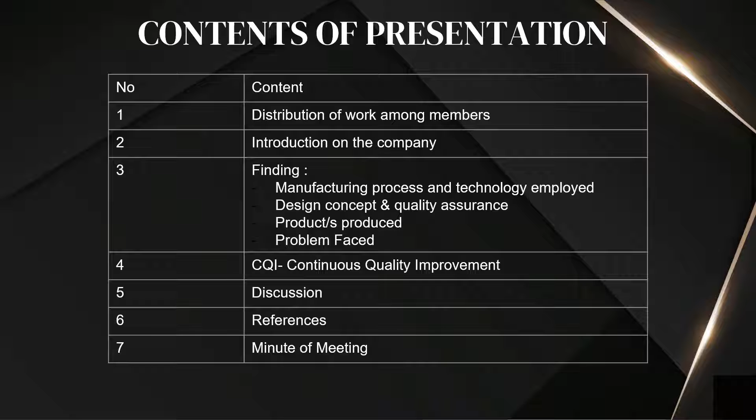This slide shows the content of our presentation. We have several content as displayed in the slide. For the distribution of work, we have distributed the team tasks for all 5 members evenly as shown in the slide.

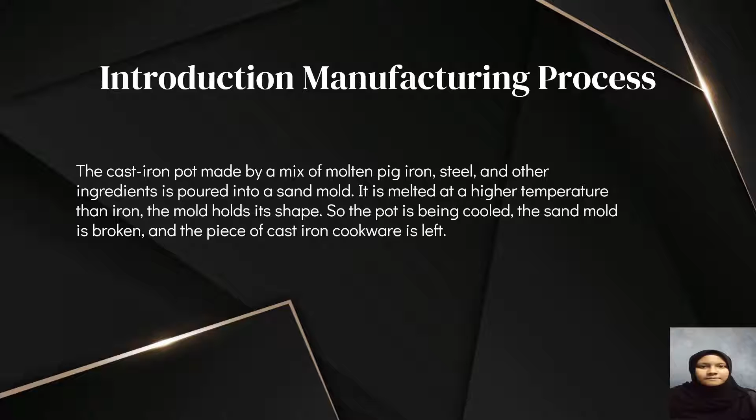The processes involved in making this cast iron frying pan are melting, casting, pouring, shakeout, scrubbing, sorting, finishing, seasoning, and packaging.

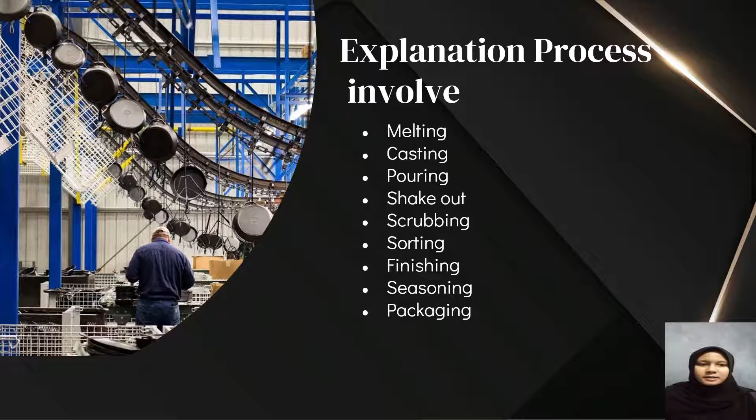Next, for the ingredients, higher quality materials such as pig iron, recycled steel, and casting from the foundry process are used for the pan. All the ingredients are transported into the loading chamber to eliminate ingredients that do not qualify with the quality standard, and weighed according to the exact recipe. After that, alloy is added to achieve precise chemistry.

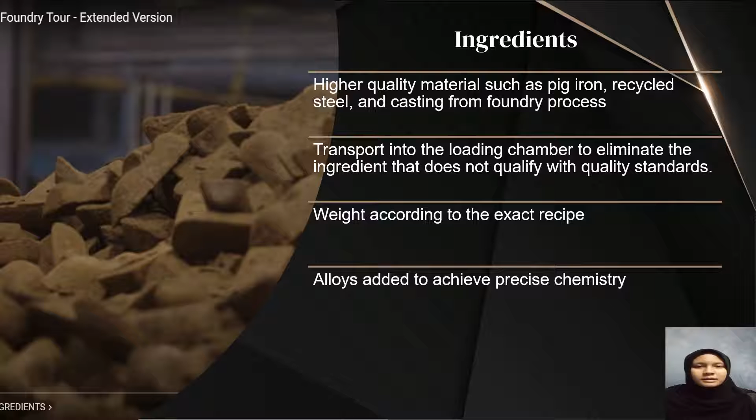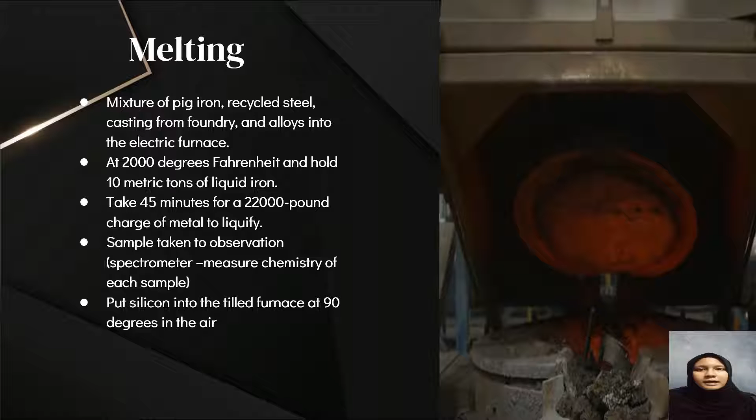Next, we go for the first process, which is melting. Melting is the change of solid into liquid when heat is applied. The mixture of pig iron, recycled steel, casting from foundry, and alloy is input into the electric furnace at 2000 degrees Fahrenheit, holding 10 metric tons of liquid iron. It takes 45 minutes for a 22,000 pound charge of metal to liquefy. Next, a sample of the metal is taken for observation, where the spectrometer is used to measure the chemistry of each sample. After that, silicon is put into the tilted furnace at 90 degrees in the air.

Next, we go for the next process, which is casting. The binding agent is added in the casting process, where it holds the oxide together or the slag that forms in the metal mixture. It starts with the previous pattern, then uses the disamatic molding machine to press a mixture of sand, water, and clay against the pattern. The mixture travels through a conveyor to a funnel, then to the molding machine, and the mold is created. This company is capable of making 350 to 400 molds in an hour.

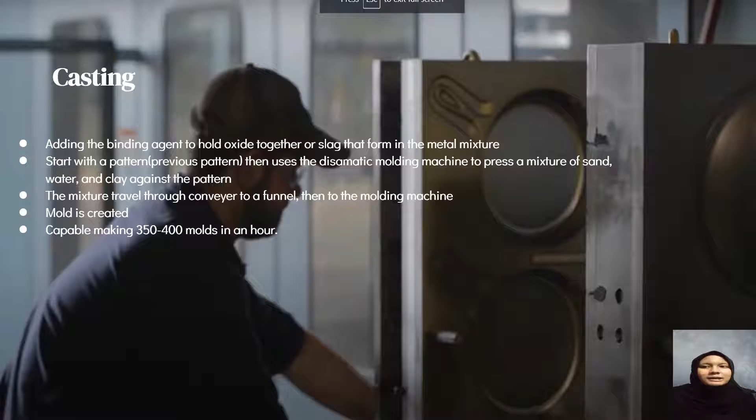Next, pouring. When the sand mold is created and the molten iron hits the right temperature, the liquefied metal is poured into the mold. Since sand melts at a higher temperature than iron, it holds the shape when it comes into contact with the molten iron. Then it's off to the shakeout line.

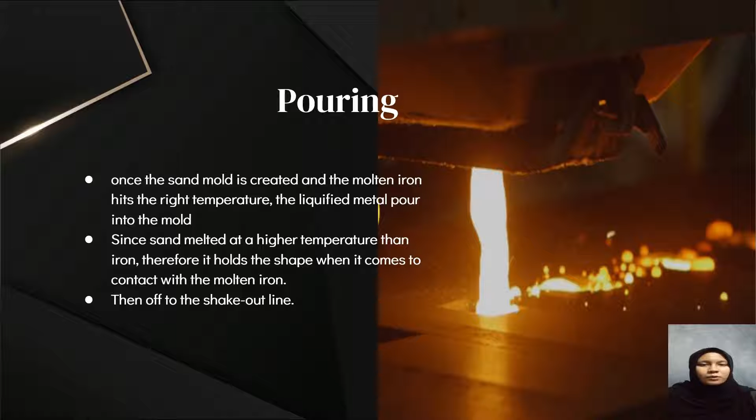Shake out and scrubbing so the cast iron will be cooled, then it will move along the vibrator conveyor to shake off the molding sand, which will be recycled. The cookware enters a rotating drum filled with iron media. The function of the iron media is to break up the sand and scrub it from the casting surface. The media is continuously recycled.

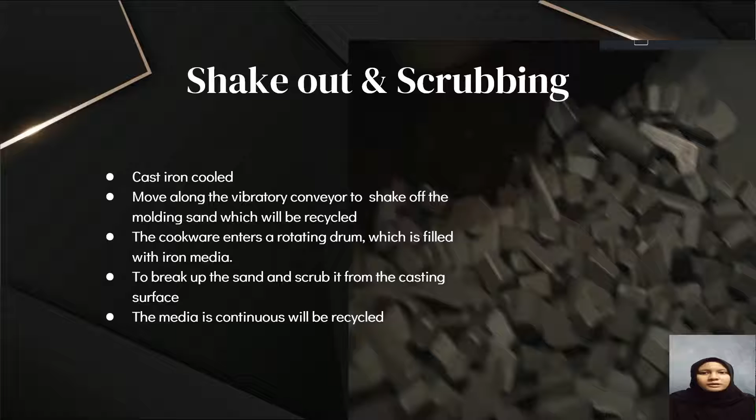Next, it will go to sorting. The cast iron will go down the line to the sorting section, where the cookware is sorted for the gating, which is the hardened channel of the iron.

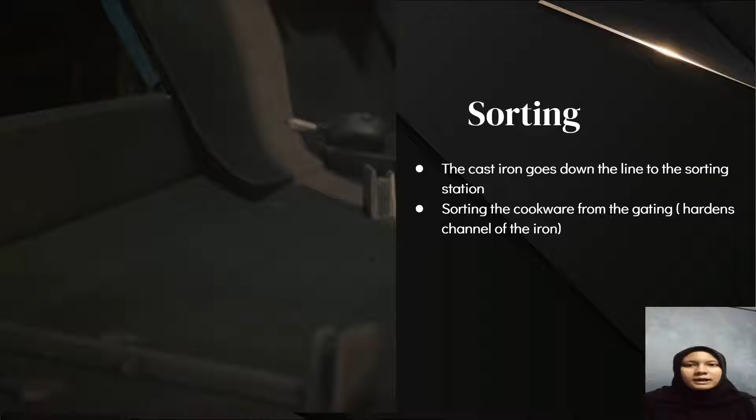After the sorting, the frying pan will undergo the cleaning process. It will be cleaned with a fine steel shot blaster on all sides inside the machine. The grinder is used to remove any side edge left from the gating.

The cookware will fall into a bath of stainless steel media, soap and water to enhance the finish. The stainless steel media is designed to come into complete contact with every inch of the skillet for a deep clean. Once cleaned, the frying pan will hang on the conveyor to be seasoned.

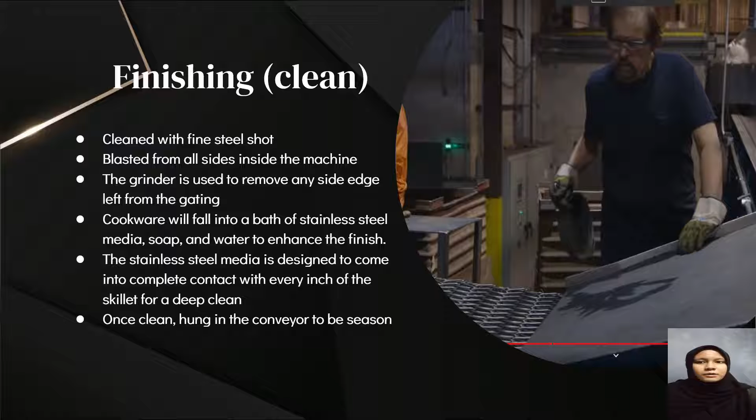The frying pan will go through a hot rinse and hot air blow off, then be sprayed with vegetable oil. The frying pan will be baked at a high temperature, above the range of a typical household oven. This creates a natural, easy-release finish that gets better with use.

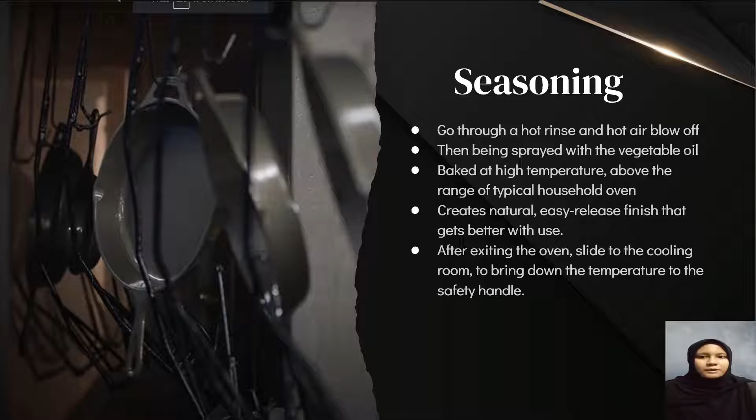After exiting the oven, the frying pan will slide to the cooling room to bring down the temperature to a safe handling level. After going through all the manufacturing processes, the frying pan will undergo the packaging process.

The final inspection will be done before packing it with biodegradable paper and corrugated packing material, ready for distribution.

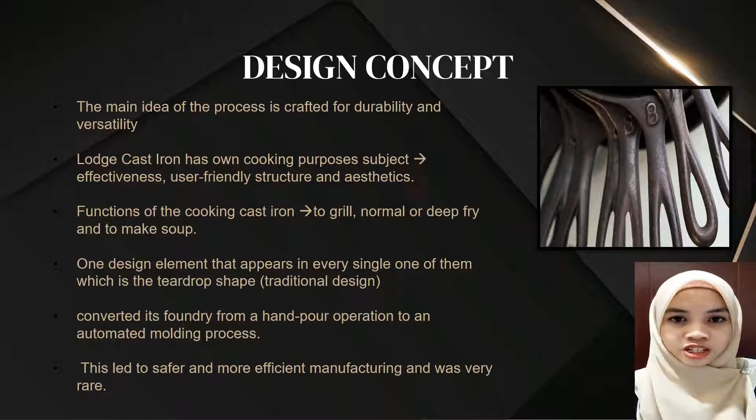In 1950, Lodge responded to growing business demand and converted its foundry from a hand-pour operation to an automated molding process. This led to safer and more efficient manufacturing that, at the time, was very rare.

Quality assurance is the activity focused on the process used to create the deliverable. The first one is strengthening - strengthening is used to enhance the strengthened cookware. It is cleaned with a fine steel shot, then the cookware falls into a bath of stainless steel media, soap and water. The stainless steel media is designed to come into complete contact with every inch of the skillet for a deep clean.

The second one is seasoning and temperature. The cookware goes through a hot rinse and hot air blow off, then is sprayed with vegetable oil and baked at a high temperature, well above the range of a typical household oven. Seasoning forms a natural, easy-release cooking surface and helps prevent the pan from rusting.

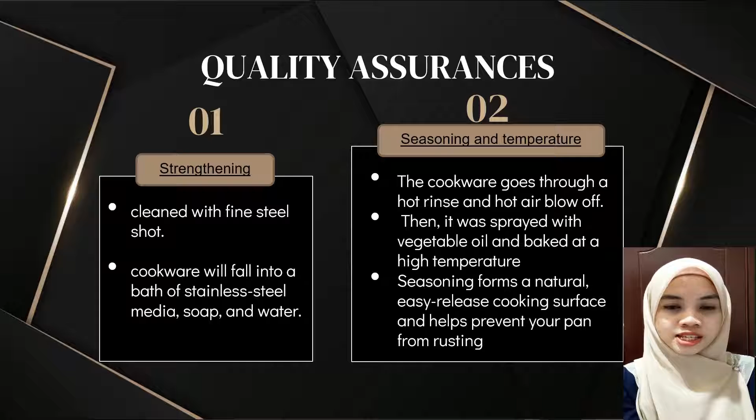Lodge Cast Iron Company produces a lot of quality products. We can categorize their products into some types, such as bakeware, Dutch ovens, griddles, grill pans and grill presses, grilling, heat-treated cast iron, and skillets.

Now I will show some examples of their products from each type of product produced by this company, so we can know more clearly about the products produced by this company.

Firstly is bakeware. With their seasoned cast iron bakeware collection, it's easy to make homemade baked goods and casseroles that rival your favorite bakery and restaurants. Each item of their cast iron bakeware has an ergonomic design that is easy to grip, lift, and move around the kitchen.

Secondly is the Dutch oven. A Dutch oven is a heavy cooking pot with a tightly fitting lid that is good for braising. Dutch ovens are also excellent for making soups and stews.

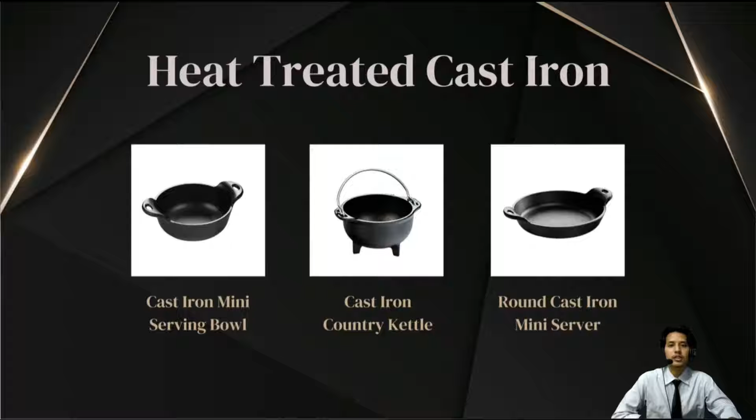Heat-treated cast iron was produced to keep food hot from oven to table. It is also made with a patented heat treatment process that prevents rust. This product is also dishwasher safe.

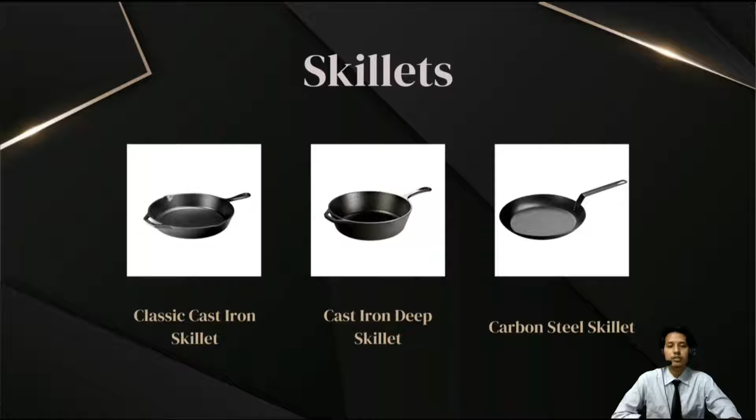The last type of product produced by this company is skillets. This type of product is commonly used for searing, roasting, and frying foods over moderate to high heat. That's all from me, thank you.

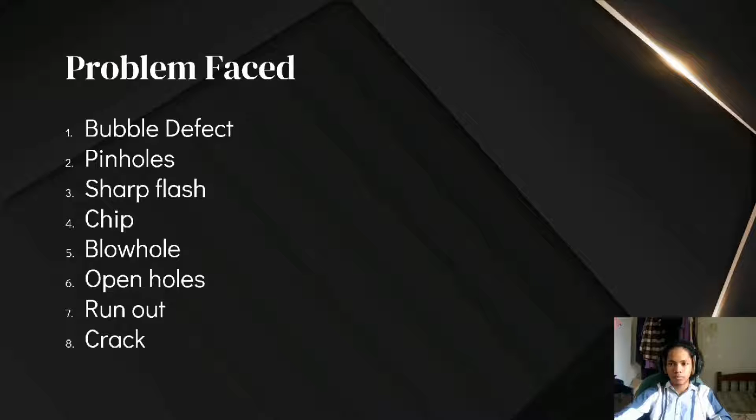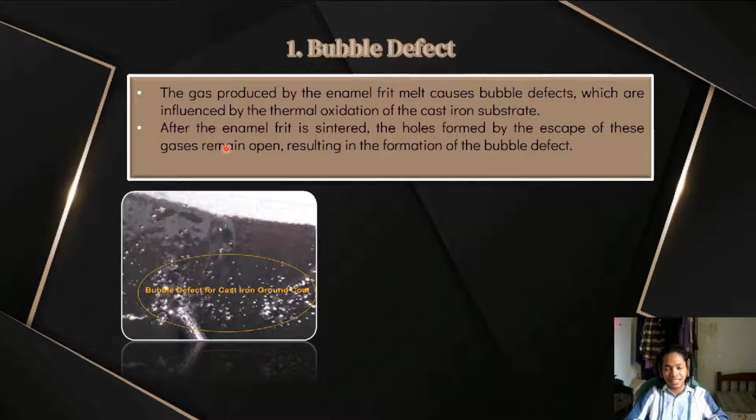So the first one is bubble defect. This happens when gas produced by the molten fluid, influenced by thermal oxidation, forms bubbles. When casting the cast iron, oxidation between the cast iron pan and fire will produce bubble defect. After the molten fluid is sintered, the hole formed by the escape of these gases remains open, resulting in the formation of a bubble defect. As you can see here, this is a bubble defect on the casting iron.

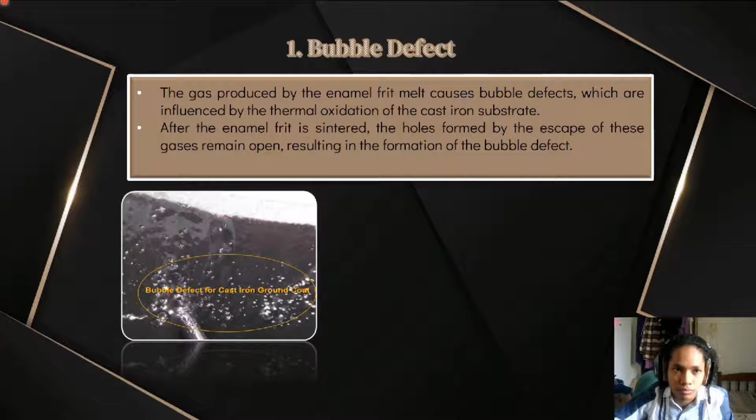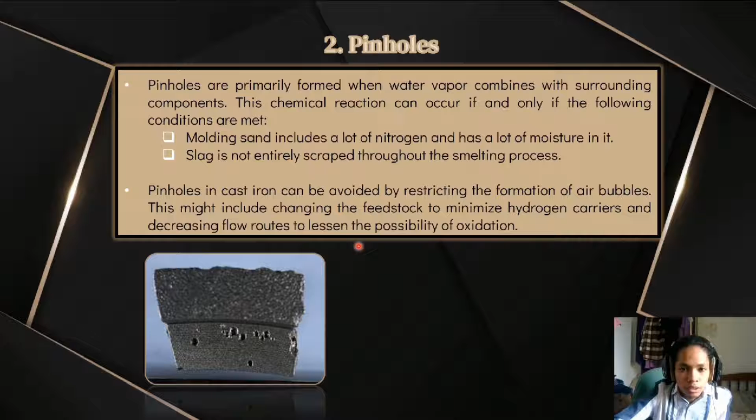Next we go to pinhole. Pinhole is a common defect in casting. Pinholes are primarily formed when water vapor combines with surrounding components. This chemical reaction can occur if the following conditions are met: the molding sand includes a lot of nitrogen and has a lot of moisture in it, and the slag is not entirely scraped throughout the smelting process. Pinholes in cast iron can be avoided by restricting the formation of air bubbles. This might include changing the feedstock to minimize hydrogen carriers and decreasing flow routes to lessen the possibility of oxidation.

Next is sharp flash. Sharp flash is defined as a surplus of material that seems more like a protrusion towards the product edge. This casting flaw is caused by a faulty molding plate, which can cause inadequate clamp force, an ill-fitting mold plate during the injection procedure, and overfilling.

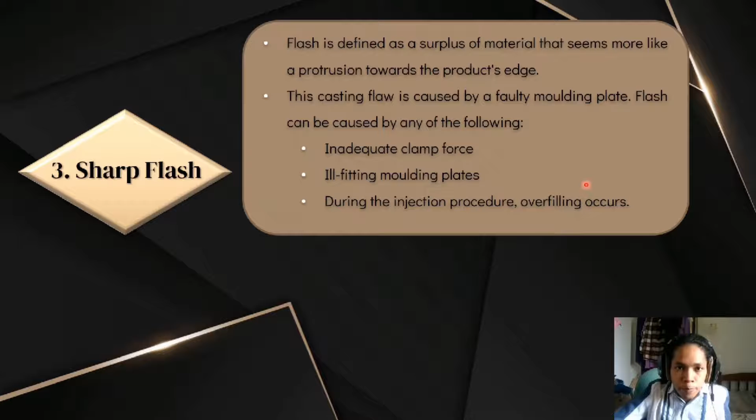Next is chip. Chip is commonly found while casting the cast iron pan. Chip appears on the cookware when the substrate texture is coarse or inconsistent as a result of the heat treatment during the manufacturing process.

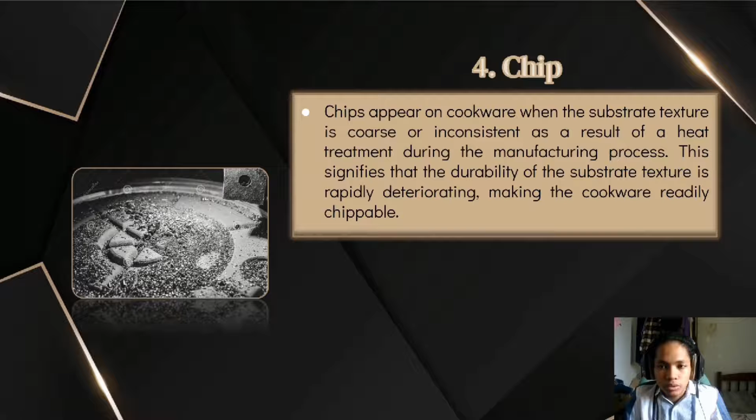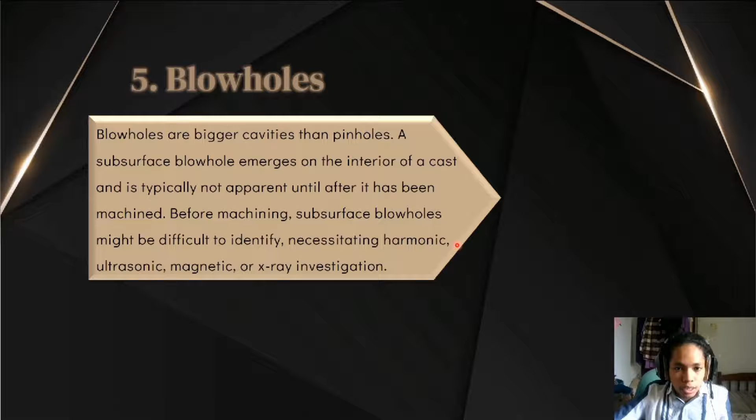Next is blowhole. Blowhole is a bigger cavity than pinhole. A subsurface blowhole emerges on the interior of a cast and is typically not apparent until after it has been machined. Before machining, blowhole might be difficult to identify, but after machining, we can see it, as in the next slide, which shows open hole and blowhole.

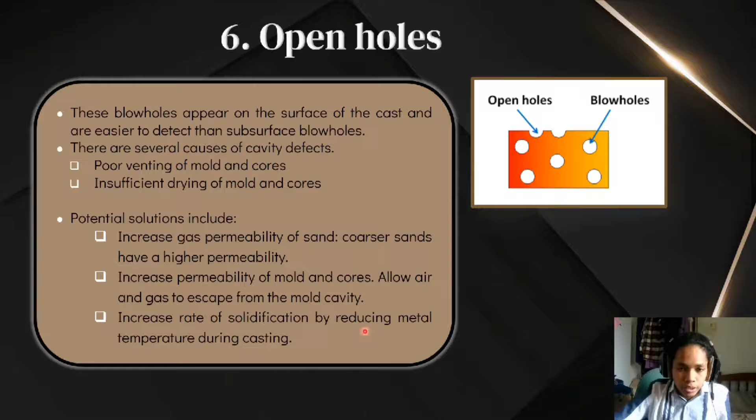Next, high temperature can lead to excess wear and tear of the mold. So use quality material for your mold that can resist high temperature.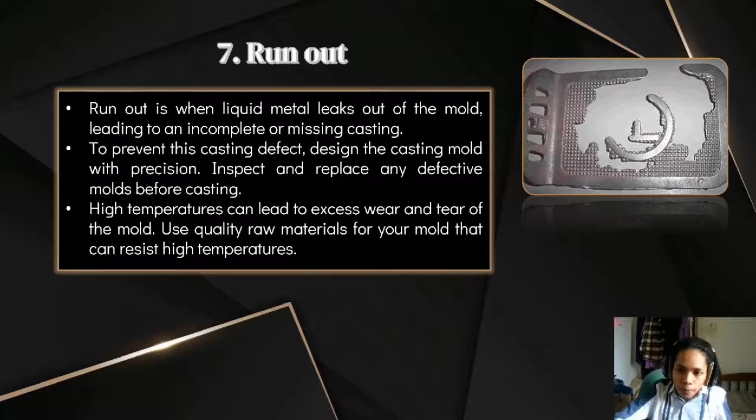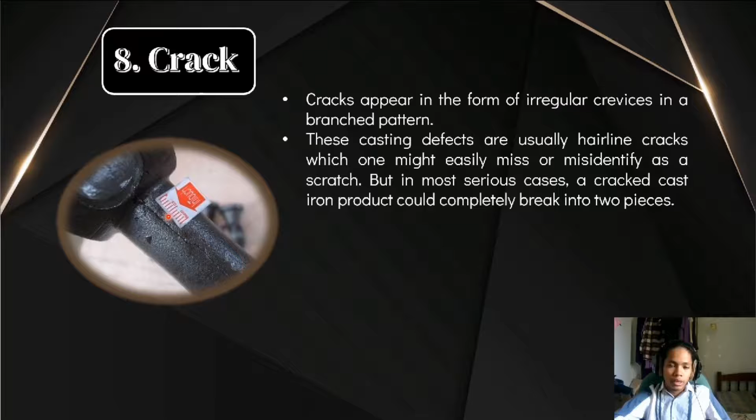Last but not least, the crack. Crack appears in the form of an irregular crevice in a branch pattern. These casting defects are usually hairline cracks, which one might easily miss or misidentify as a scratch. But in the most serious case, this crack can completely break into two pieces. So we can avoid this by having more inspection.

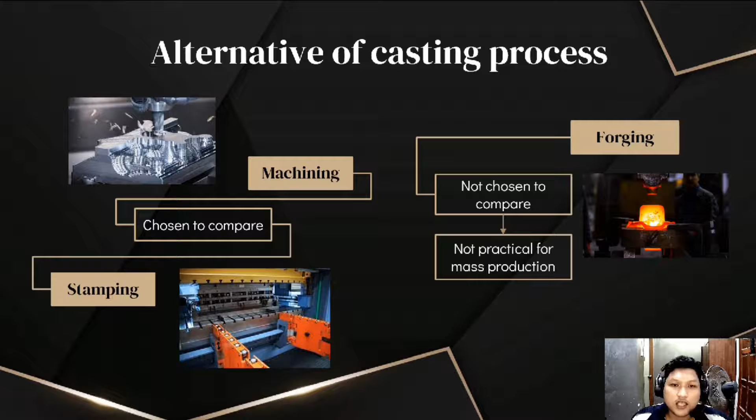Lodge Company chose the casting process as their main method to produce their signature cast iron pan. The question is, why did Lodge Company choose this method? We listed alternative processes: machining, stamping, and forging. We chose machining and stamping to be compared with casting, as forging is impractical for mass production.

These are the comparisons of the chosen processes. First is the casting process, used by the company. The second is machining, and third is stamping.

The advantages of the casting process are low tooling cost, design flexibility, and short lead time. The disadvantages are that it's not suitable for low volume production, gives a poor surface finish, and has dimensional accuracy problems.

For the machining process, the advantages are a high surface finish can be obtained, good dimensional accuracy, and a variety of geometry features are possible. But the disadvantages are that it's expensive and creates a lot of waste.

For the stamping process, the advantages are cost efficiency, great accuracy, and simple operation. The disadvantages are that it requires tooling in advance and it only works with non-ferrous metal, which is not suitable for cast iron.

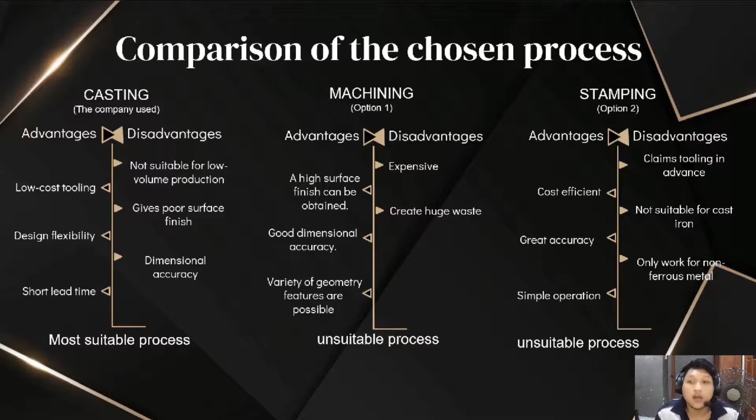From all these processes, we conclude that casting is the most suitable process to produce the cast iron pan, which is already made by the company.

From the comparison, we know that casting is the more suitable process to produce a cast iron pan, but we cannot deny that if the stamping process could work, it would be a huge advantage for the company. These are our suggestions for the stamping process to work.

First, by using ductile cast iron, also known as ductile iron. Ductile iron is a durable, fatigue-resistant metal due to its spherical graphite structure. The first patent was in 1948. Ductile iron is today's version of cast iron.

The advantage of ductile iron is its ductility. It can be bent and shaped, unlike regular grey cast iron, which is brittle and breaks when you try to shape it. Another advantage is high resistance to impact compared to grey cast iron.

The disadvantages are lower vibration dampening. It also has lower thermal conductivity, which is 36 watts per meter Kelvin, compared to grey cast iron, which is 52 watts per meter Kelvin.

If Lodge Company wants to use this process, the company could also produce several other products such as silverware, mixing bowls, and cooking woks.

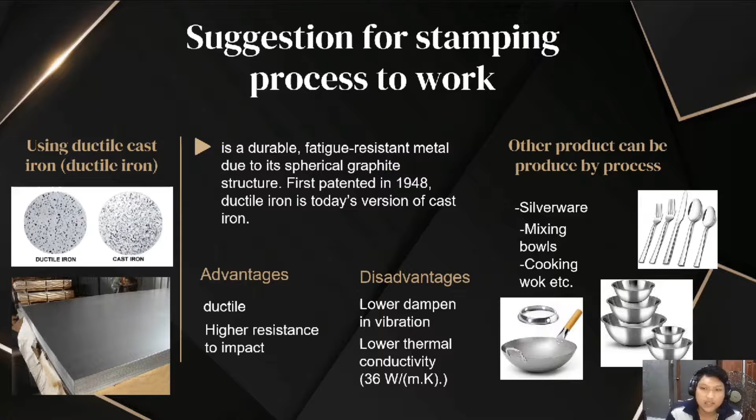The solution for the problems that occur during the process, such as the defects explained by my friend Zohelmi, one solution is mold inspection. Mold inspection has to be done to make sure the pattern plate is installed and oriented in the same direction. This helps to see if there are any inaccuracies in pin placement and also prevents sharp flash from occurring.

The next solution is a better design of mold. This can be achieved by using a sprue and sprue system with a riser tube to supply the molten metal and include channels for the metal to flow into the mold.

The last solution is mold quality assurance. This is to avoid pinholes, voids, and open holes by ensuring the foundry sand is dry and permeable. We must make sure the mold and core are dry and stored dry before use, to ensure there is enough ventilation for the mold to allow gas to escape.

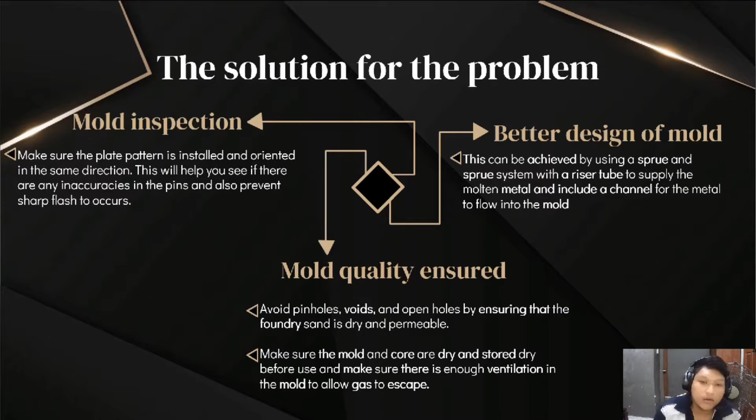Now I will continue with the continuous quality improvement for the task. The problem we faced during the task is a lack of resources. Due to online learning, we hardly found a company with good details of the manufacturing process on the internet. We also couldn't feel the true experience of visiting a company.

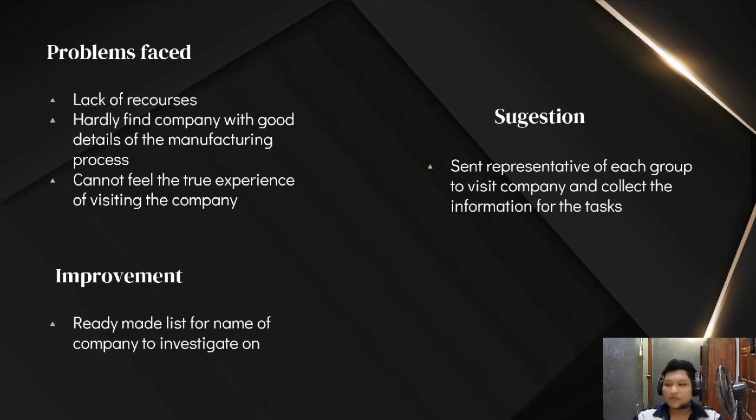The improvement that can be made is that we would be glad if there were a ready-made list of companies that we could investigate. Our suggestion is to send a representative from each group to visit or select the company to collect information for the task. Due to the fewer number of people and social distancing, we couldn't see if there were any problems, and this method is much more effective compared to online browsing.